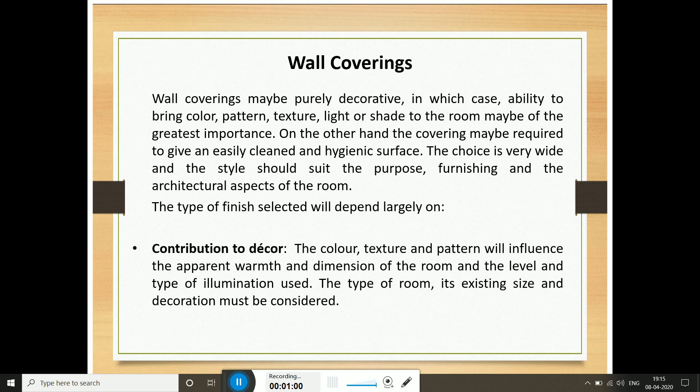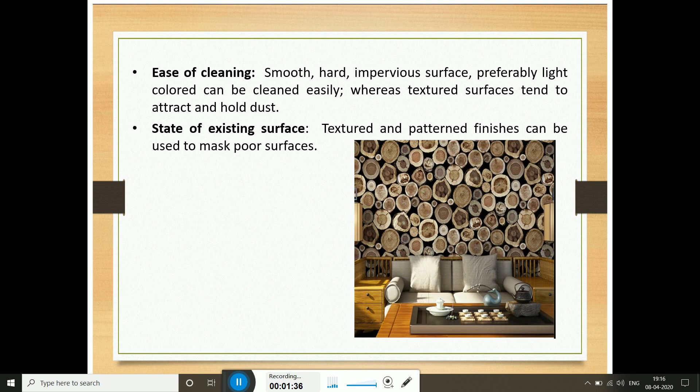The ease of cleaning. Smooth, hard, impervious surfaces, preferably light colored, can be cleaned easily, whereas textured surfaces tend to attract and hold dust. Third, the state of existing surface. The textured and patterned finish can be used to mask poor surfaces. Then we have the resistance to abrasion and knocks. Hard surfaces will be best for this purpose.

Stain resistance. A non-porous surface has more resistance than the porous ones. Durability. Surfaces subject to abuse, knocks, stains, and abrasion require finishes that are resistant, can be cleaned easily, inexpensively restored, or repaired whenever required. Life expectancy. Where decor of the room is intended to change relatively frequently, less expensive finishes are appropriate.

Insulation. As much as possible, finishes with good sound insulation properties should be selected. Cost. While comparing cost of different finishes, not only should the cost of the material and the application be considered, but also the cost of its damage, restoration, and expected frequency of complete redecoration should be borne in mind.

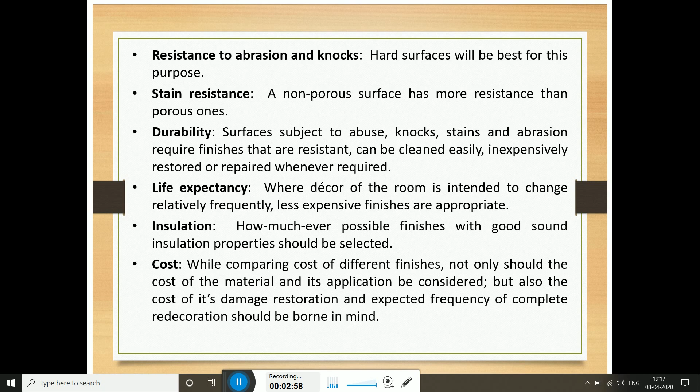Let's talk about the various types of the wall coverings. First, we have paints and lacquers. Paints can be applied to almost any surface providing it is free from water, grease, or dust and is of sound construction. For example, plaster must be smooth, hard, and not flaking from the underlying plasters or brickwork. As wall covering, paints offer a wide choice of types, colors, degrees of gloss, and design.

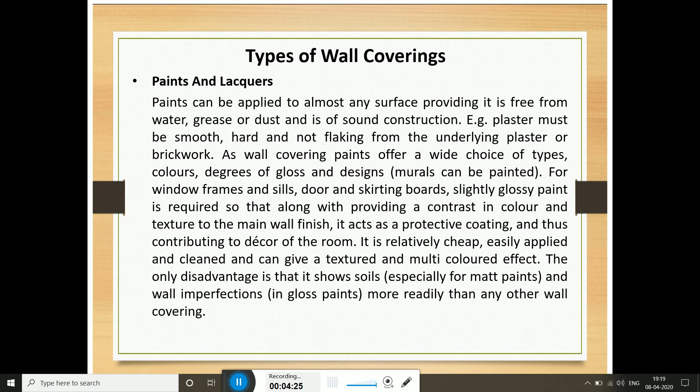For window frames and sills, doors, and skirting boards, slightly glossy paint is required so that, along with providing a contrast in color and texture to the main wall finish, it acts as a protective coating and thus contributes to decor of the room. It is relatively cheap, easily applied and cleaned, and can give a textured and multicolored effect. The only disadvantage is that it shows soils and wall imperfections more readily than any other wall covering.

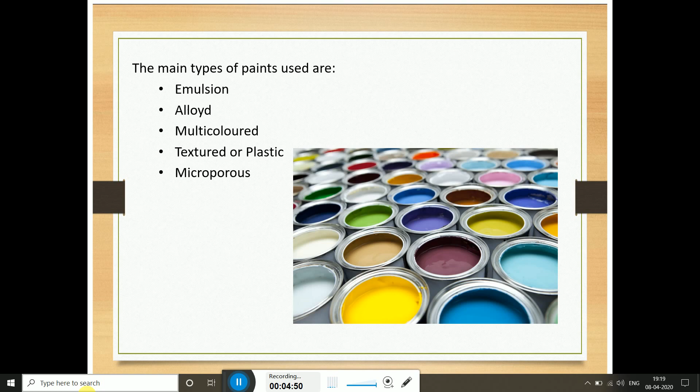What are the different types of the paints which are used in the wall covering? These are emulsion, alkyds, multicolored, textured or plastic, and microporous. Let's talk about some of them in detail. The emulsion paints. They are water thinned but are based on dispersions of synthetic resins. For example, polyvinyl acetate.

Alkyd paints. They are based on synthetic resins combined with vegetable oil, such as linseed oil. The conventional types were natural resins, which are still used in primers and undercoat paints. Alkyd paints are generally easier to apply and have better durability and wearing property than any other type. Polyurethane and silicone are sometimes included to give more scratch resistant surfaces. They are available in gloss, silk, and flat finish.

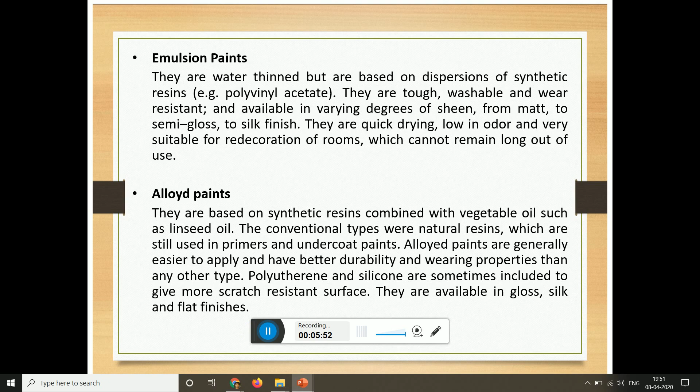Multicolored paint. They are usually dispersions of cellulose colors in water. Each color is present in separate blobs or spots. The resulting effect depends on number of different colors, degree of contrast between them, and the size and distribution of spots. This paint should be applied by spraying. It is extremely hard wearing and the multicolor effect helps in hiding the irregularities and imperfections. It is usually applied on walls of corridors, sanitary accommodations, and similar areas to give a stain and abrasion resistant finish, which can be washed and cleaned regularly.

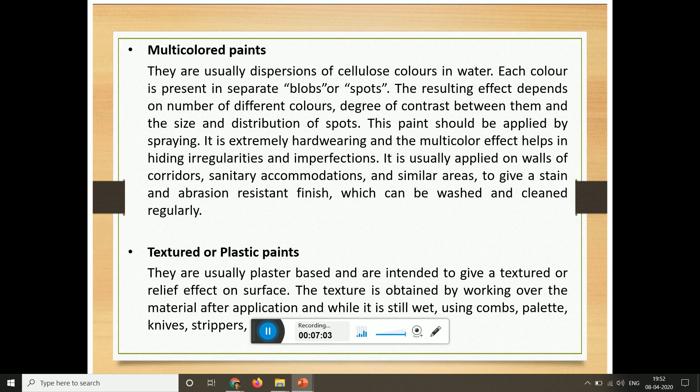Let's talk about textured and plastic paints. They are usually plaster based and are intended to give a textured or relief effect on surface. The texture is obtained by working over the material after application and while it is still wet using combs, palettes, knives, strippers, etc. Some are self-colored while others may require painting when they dry. The modern types are based on heavy-bodied synthetic resin emulsions, and may be applied by spraying directly on the concrete or similar surfaces, thus eliminating the need of plaster.

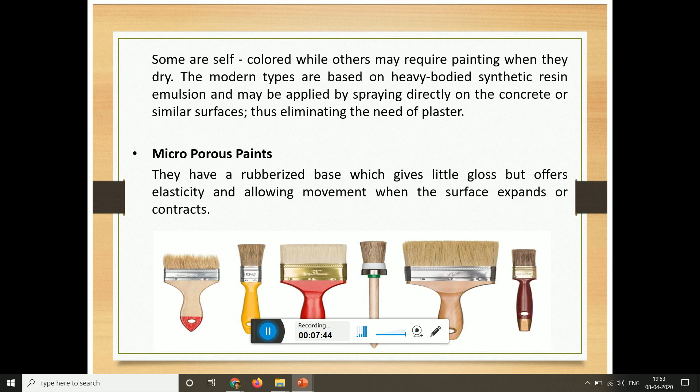Microporous paints. They have a rubberized base which gives little gloss but offers elasticity, allowing movement when the surface expands or contracts. The other wall covering is known as wallpapers. They may be smooth or have a textured surface effect.

This may be done by superimposing or interlacing of other substance to give a rough surface, or by clever designing where visual effects give an apparent depth. Smooth finishes are more resistant to dust and dirt than rough ones, but generally stains show more in smooth finishes. The pattern may be floral, geometric, abstract, striped, etc. The choice depends on the room's aspect, height, size, and use of room.

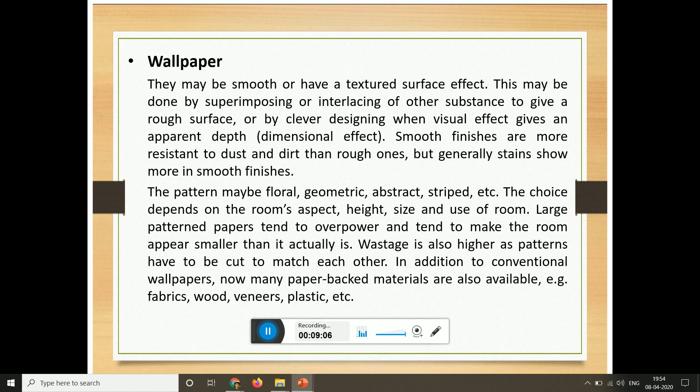Large patterned papers tend to overpower and tend to make the room appear smaller than it actually is. Wastage is also higher as patterns have to be cut to match each other. In addition to conventional wallpapers, now many paper backed materials are also available. For example, the fabrics, woods, veneers, plastics, etc.

The main type of these papers are the surface printed papers. A pattern is applied to the surface of the paper by one of the following methods. One, by the use of hand printing or with the help of screen printing. A wide range of colors and designs are produced with usually a smooth surface finish. The cost is related to the design and the method of reproduction. The paper is not washable and damp wiping must be undertaken with great care. It can be easily soiled and stained as well.

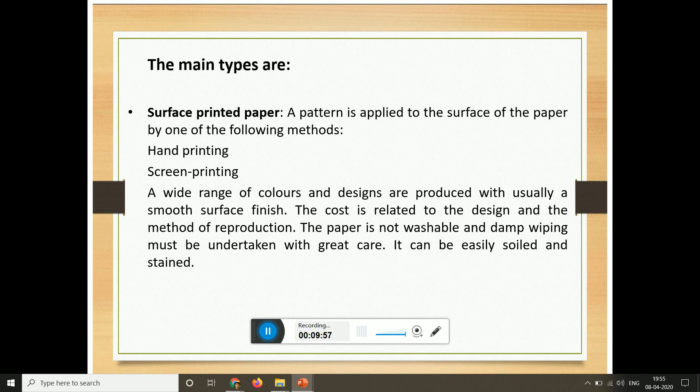Spongeable paper is specially treated during manufacturing to withstand water. It is similar in all other aspects to surface printed papers.

Washable papers are similar to surface printed papers but have a plastic coating, giving them good stain resistance and enabling them to withstand washing.

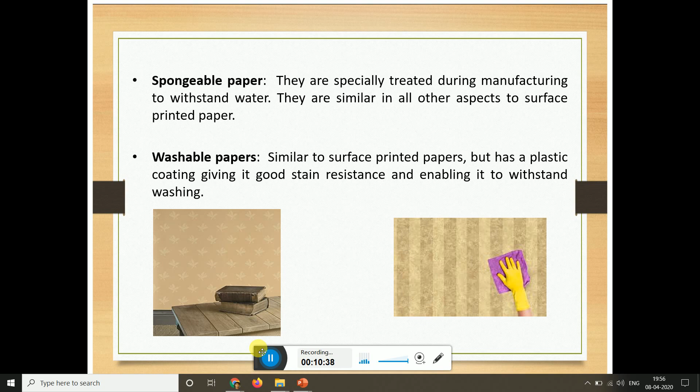Anaglypta is an embossed paper that is relatively inexpensive, used to cover poor surfaces. It is normally painted after hanging, and its stain resistance and washability depend on the type of paint applied.

Another category is Lincrusta, a heavily embossed paper that may have a plastic coating containing a paper-backed textured composition, frequently simulating wood paneling.

The wood chip paper, or oatmeal paper, has wooden flourings or chips sandwiched between two layers of paper. Its properties are similar to Anaglypta paper.

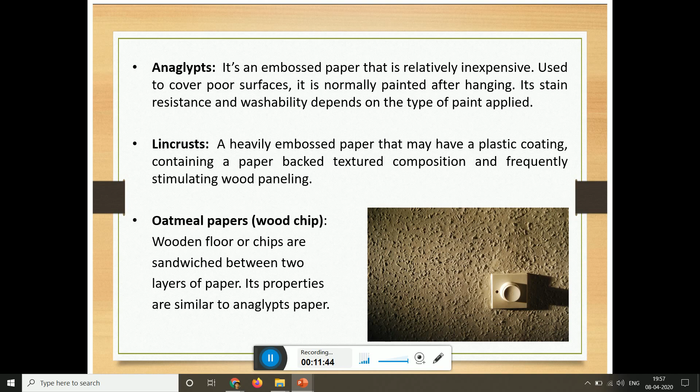Flock papers have a raised patterned pile fixed with adhesive to a paper backing. The piles may be cotton, silk, wool, or synthetic. It attracts and holds dust and is expensive. The surface of the paper may be damp wiped.

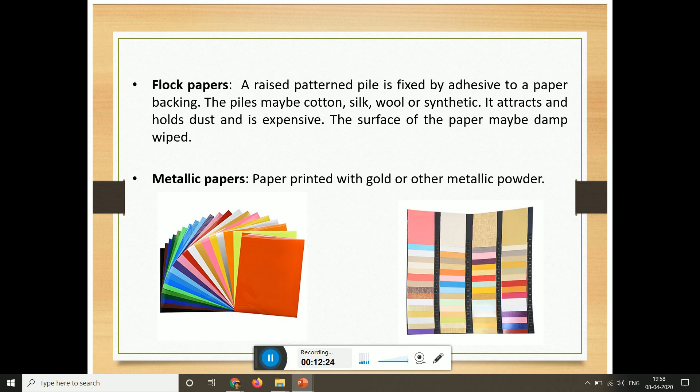Metallic papers are papers printed with gold or other metallic powders. Wood grain papers are photographic reproductions of various wood grains, waxed during manufacture.

Paper-backed hessians have strands of hessian fixed to a paper backing to give the appearance of a hessian covering. It is not washable, but the surface can be damp wiped. It is easily stained and damaged by abrasion, and is available in a large variety of colors.

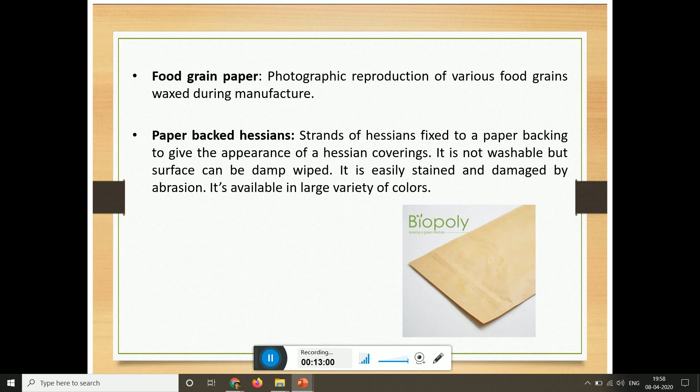Other categories of wallpapers are paper-backed woven grasses and paper-backed wools.

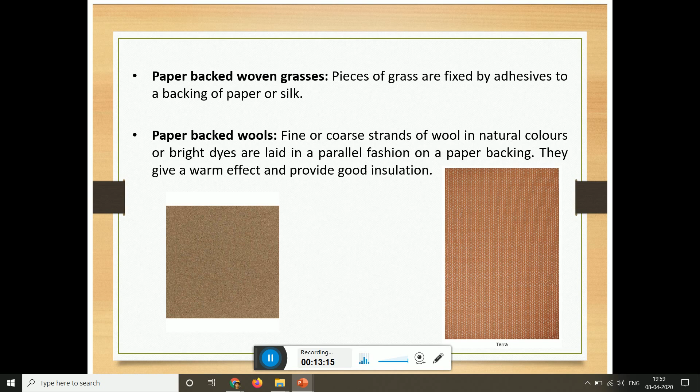Now let's talk about the advantages and disadvantages of wallpaper. As we all know, these days wallpapers are very much in trend as they contribute majorly to decor. They have the ability to cover poor surfaces and provide high insulation.

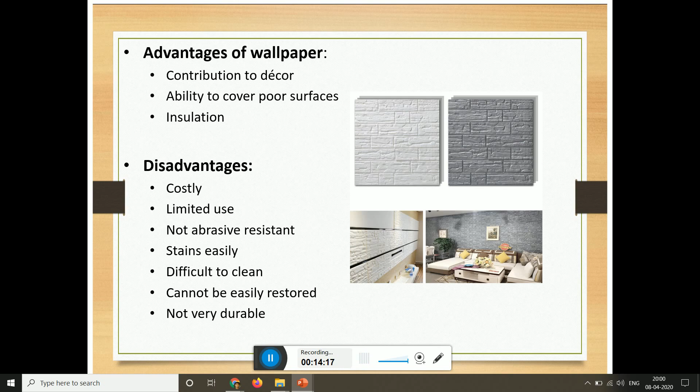The disadvantages of such wall coverings are that they are costly in nature, can be used only in a limited way, can be easily affected by abrasion, and can stain easily. It is very difficult to clean because it is made of paper, and paper has a soaking capacity. It is also not very durable.

Let's talk about some cloths used in covering walls. One is polyvinyl chloride cloth, or PVC cloth. These are woven cotton finished with a layer of PVC, used to form decorative panels on walls or doors. It may be plain or quilted, involving foam stuffing, and fixed by adhesive or metal studs. It produces a luxurious effect and improves sound and thermal insulation, but is expensive and difficult to repair satisfactorily.

Leather. They are extremely expensive but very decorative. They may be padded and studded with brass studs. They are usually not used to cover the whole wall, but for effect wherever required, and can be simulated with plastics.

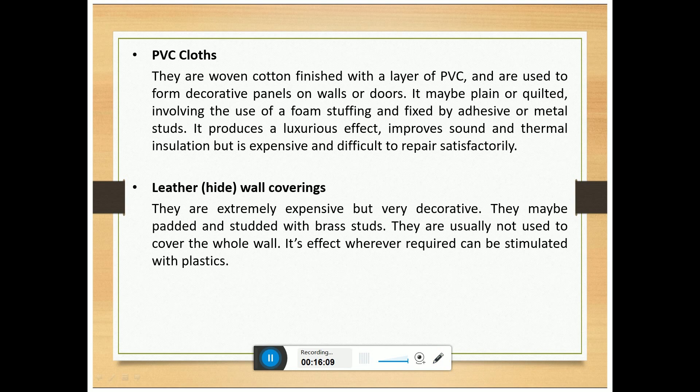Let's talk about the other category known as plastic wall covering. Plastic wall coverings are available in a large variety owing to their abrasion resistance. They are more hard wearing and easily cleaned than any other covering.

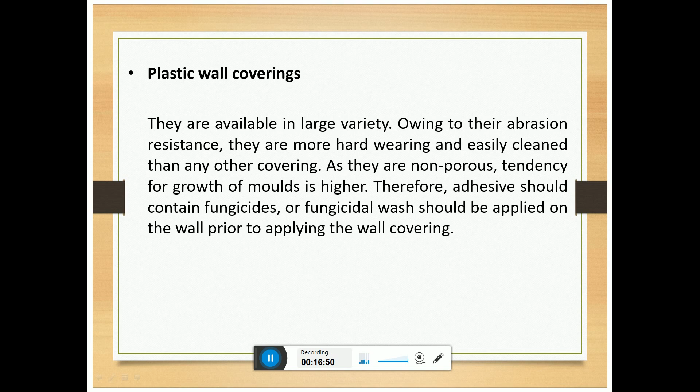As they are non-porous, the tendency of growth of molds is higher. Therefore, the adhesive should contain fungicides, or a fungicidal wash should be applied on the wall prior to applying the wall covering.

There are various other subcategories as well. Some are paper-backed vinyl. The vinyl may have the appearance of almost any material, for example silk, tweed, hessian, cork, grass paper, wood, stone, or brick. Then we have fabric-backed vinyl, plastic wall tiles, laminated plastics, and expanded polyurethane.

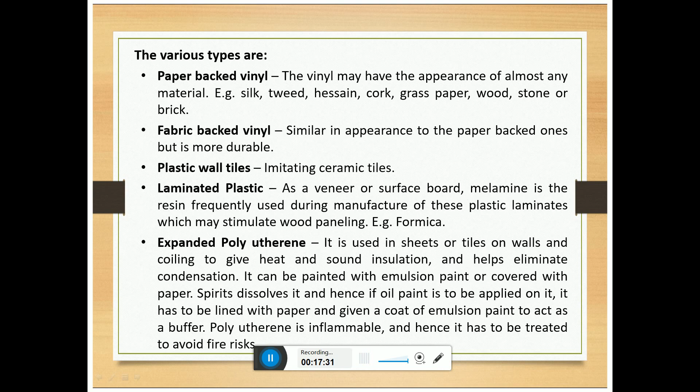Fabric wall covering: the fabric chosen should not be liable to sag, buckle, or stretch when hung permanently on the wall, and should not collect excessive dust or dirt.

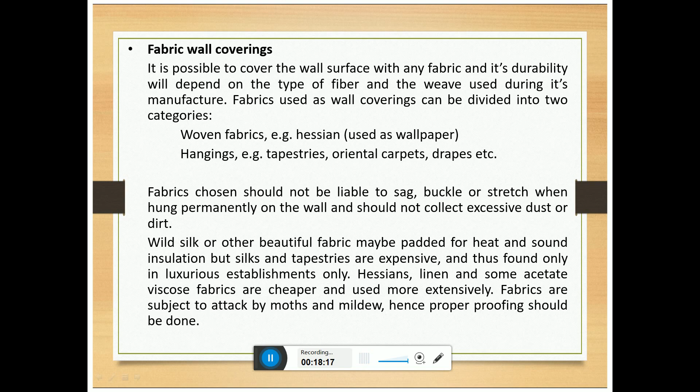Woven fabric, for example hessian, is majorly used as wallpaper, but as hangings it includes tapestries, oriental carpets, drapes, etc. It is durable in nature, but this also depends upon the type of fiber and the weaving used.

Then we have the glass wall covering. Glass can be used in the form of decorative tiles, mosaics, bricks, or full sheets. Glass bricks allow light to pass through the wall itself.

Colored opaque glass sheets or tiles may be used in bathrooms. Mirror tiles are used to reflect light and alter the apparent size of a space. Large uniform mirrors may be used to cover the whole wall, like over a vanity unit, dressing table, or onto a corridor wall. It consists of polyester film vacuum coated with aluminum and mounted on a flat frame.

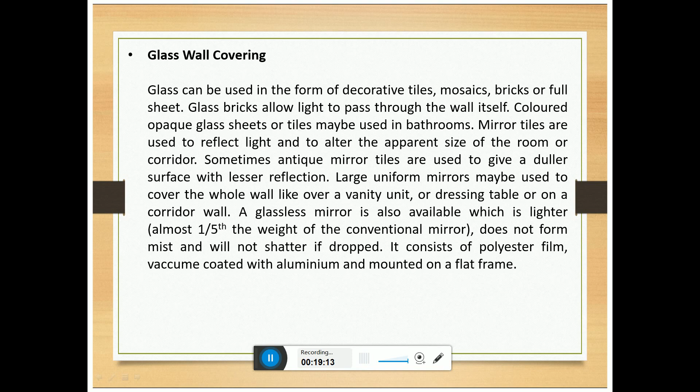Now let's talk about the wood paneling. The wood used for paneling are usually hard, well seasoned and of a decorative appearance. Most commonly used types are oaks, mahogany, teak, etc.

It may cover the wall from corner to corner. It may be solid or veneered and finished with wax polish. It will last for years with little maintenance, providing precautions are taken in respect of dry rot and woodworms, though the initial installation cost will be high.

Wood paneling is usually found in entrance halls, staircases, assembly halls, boardrooms, and restaurants.

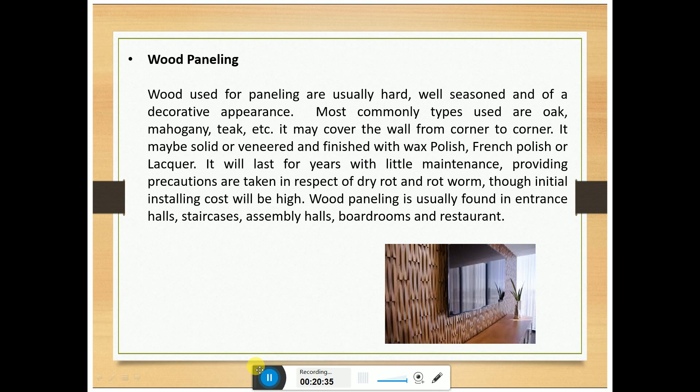The metal wall covering. Metals can be used as wall coverings for their hygienic qualities. Copper and anodized aluminium are decorative and may be used in areas such as bars, where metals in combination with rows of bottles and interesting lighting create an impressive effect. Stainless steel is used in tile form in kitchens, where they present a durable, easy clean, hygienic surface.

Metal skirting boards cover edges between walls and floor surfaces. Metal foil can be elegantly and sparingly used as a wall covering.

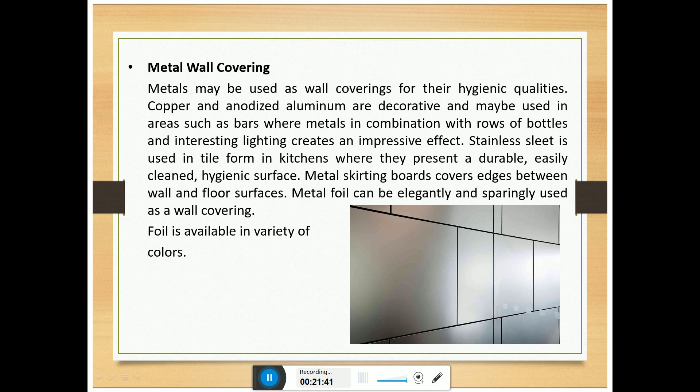Other materials which can be used as a floor covering can also be used as a wall covering. They provide different colors, patterns, and textures. Though expensive, they are hard wearing and abrasion resistant. The various types are linoleum, cork, carpets, marbles, terrazzo, ceramic tiles, granite, bricks, and stones.

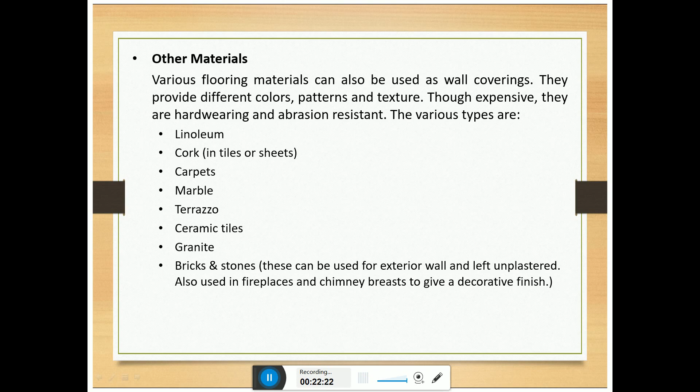Now let's talk about the various cleaning procedures for wall coverings. For the painted surface, first we need to remove the basic light dust with the help of a broom. Then we can use a damp wipe or wash if necessary and permissible. Do not ever apply wax polish or oil to gloss the painted surface, as it may absorb the oil and get stained permanently. Do not use any kind of harsh abrasive, strong solvent, or strong soda solution.

Cleaning procedure for wallpapers: remove the surface dust, use low suction for flock papers, remove marks by rubbing or sponging, and attempt to remove grease.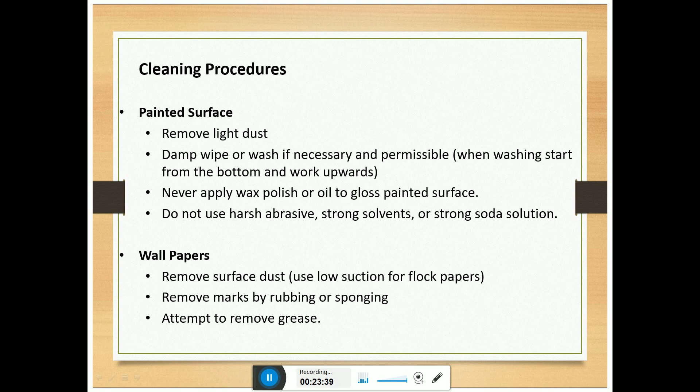Fabric wall covering: remove surface dust. For delicate hangings, dismantle and send to professional dry cleaners. Where hessian is stuck to the wall, scrub very lightly. If necessary, use warm water and detergent.

In case of wood paneling, first remove the surface dust and polish if necessary. Where paneling has become dirty or greasy, wipe with white spirit or vinegar and water, then repolish. Dark oak may be wiped over with beer.

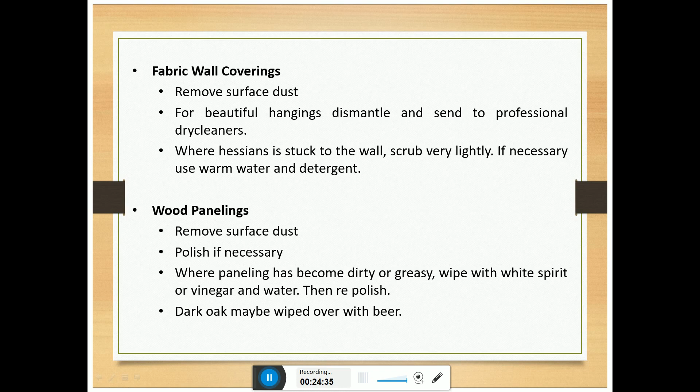Glass wall covering: dust or wipe with a damp chamois leather or scrim. Care should be taken while cleaning mirrors so that the damp does not go into the back.

Metal wall covering: dust or wipe with a damp cloth, polish if necessary. For leather wall covering, first remove the surface dust and then apply the polish sparingly and rub well.

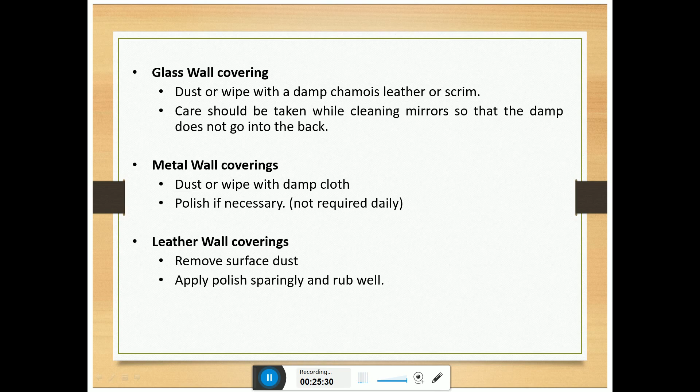For the protection of wall covering, there are certain points we need to keep in mind. First, the life expectancy of a wall covering or finish can be increased, and the cost of cleaning, maintenance, and restoration reduced, in several ways. Selection of finish should be suitable for the degree of soilage, abuse, and damage expected. Select a covering that does not hold and attract dust and can be easily cleaned and restored if damaged or stained.

Use a more durable surface that is easy to clean and maintain for the lower part of the wall. Use plastic sheets on less durable surfaces that are subjected to staining and knocks.

Fit finger plates on doors, light switches, and other places where hands will constantly come in contact with the surface. Use door stoppers to prevent damage to surfaces behind doors. Use kick plates to protect the lower part of the door.